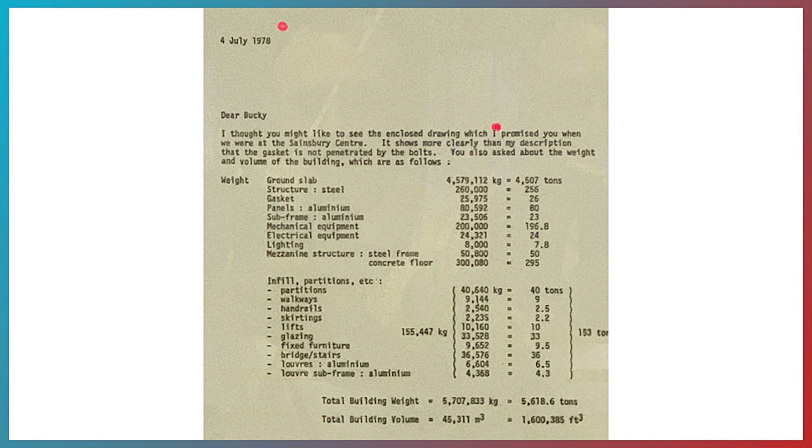Bucky asks, 'How much does your building weigh, Mr. Foster?' Two weeks later, Foster responds with a detailed letter writing, 'Dear Bucky, you asked me about the weight and volume of my building, which are as follows.' He continues to list out each category with its weight indicated beside it, including the mechanical, the structural, the interior systems and finishes, with a total building weight at the bottom stated at around 5.7 million kilograms.

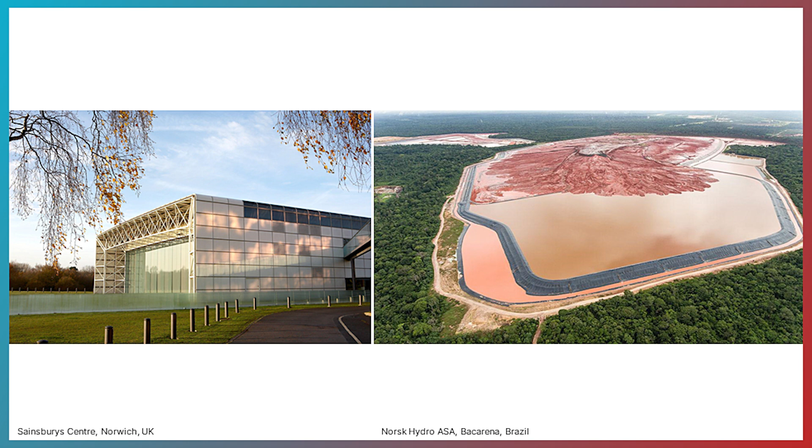However, that is not a true representation of all the weights generated by the building project. Mr. Foster's math is partially incomplete because for every ton of aluminum used in the custom panelized facade system shown on the left, 2 tons of red mud and mining byproducts are left in countries like Guinea, Australia, Brazil, and China, who export the world's aluminum. So you can't understand the Sainsbury Centre in Norwich without understanding the Norsk Hydro tailings ponds off the banks of the Amazon in Brazil. These are the same building, the same project.

So the same question should be asked of wood. What is the true mass of timber? I was fortunate that one of my first architectural jobs was a research position studying the Canadian timber industry, and I got to trace its lines across the landscape while zooming around Google Earth from the forest to the city, with a particular focus on the tools of harvest, methods, and machines.

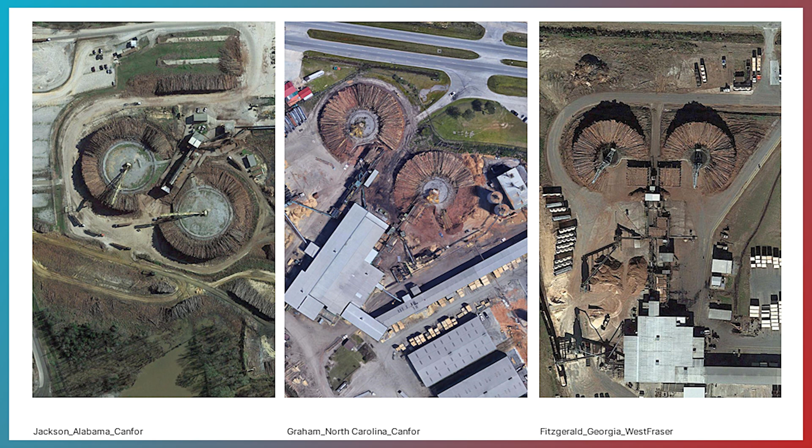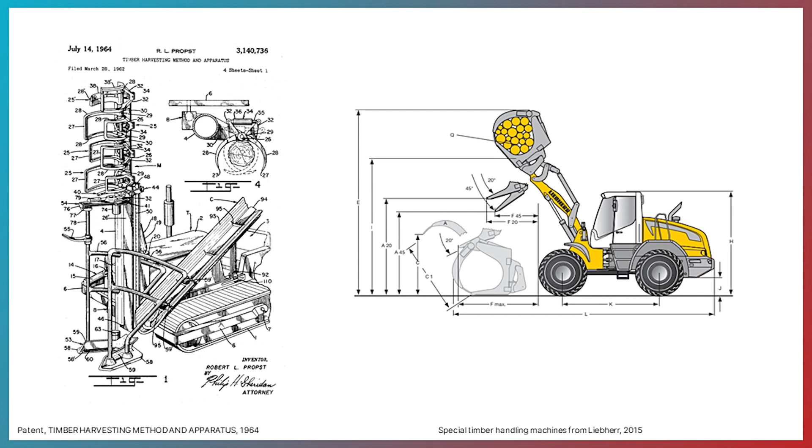As interesting to me as the statistics of roundwood sales or pulpwood exports, or even the literature on sustainable forestry management enforced across Canada, was the way the tools of harvest adapted to the land and to the true dimensions of the tree, like these remarkable geometries of play with the radial cranes, which are defined by the dimensions of the forest, the lengths and girths of the trees suitable for production. As a designer, I was especially interested in how the history of forestry shows that wood products have generally been shaped by the conditions of harvest rather than the conditions of construction or the inspiration of a draftsperson.

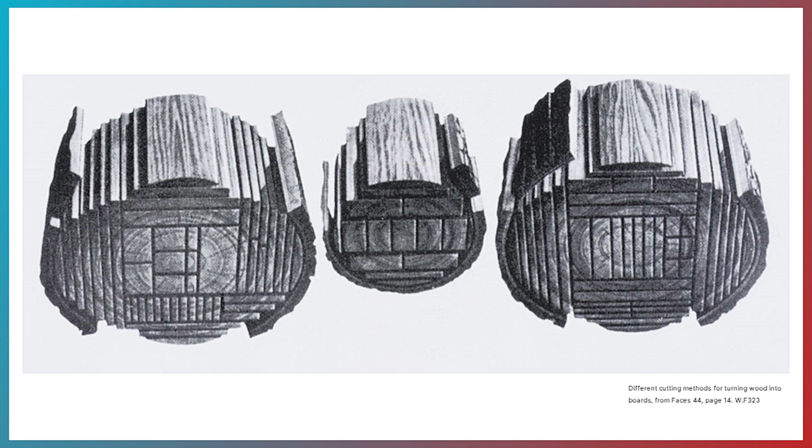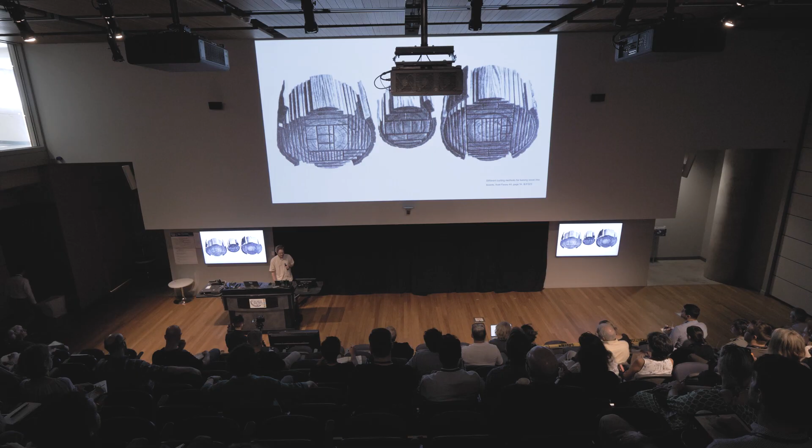I believe this can be a great advantage over other industries. Trees have a way of embodying their life cycles, presenting the externalities and history through its rings and textures. As experts in life cycle assessment, the tree is kind of doing our job for us—visualizing its own environmental impacts where it removed carbon from the atmosphere to hold in its woody tissue until it inevitably falls to make room for growth beneath.

I'm borrowing this fantastic illustration from Gray Organschi Architecture, a practice out of New Haven. This drawing illustrates how, unlike aluminum, wood has the opportunity to bring its full mass to our projects. Shown here is how each part of the tree can be used to meet the designs of our buildings.

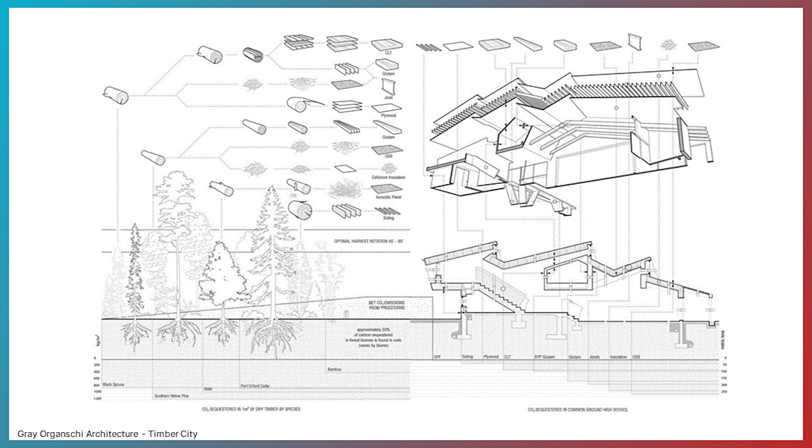At Half, we've come to understand mass differently, to include the externalities. One of my first experiences in understanding the true mass of a building was with this 7-unit townhouse development built in Toronto, just north of here, designed by Batay-Csorba Architects. We've had this saying around the office recently that we should just make it our motto to meet your heroes regularly, and this was definitely one of those situations where we got to have conversations with Andrew, the architect, which illuminated some of the project constraints and decisions informing some of these beautiful details and material choices.

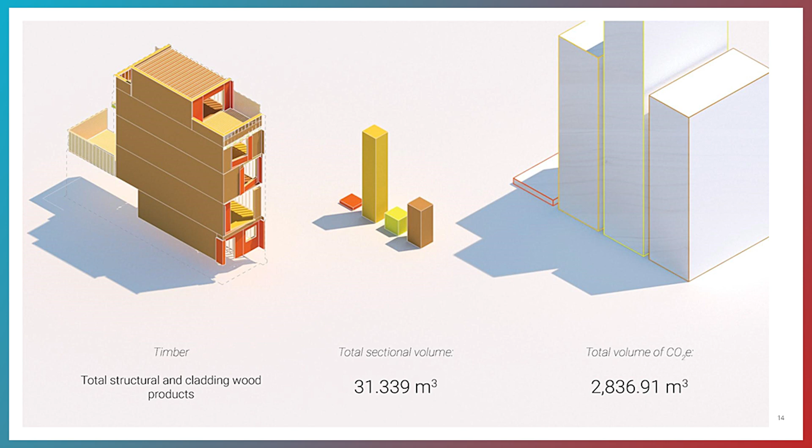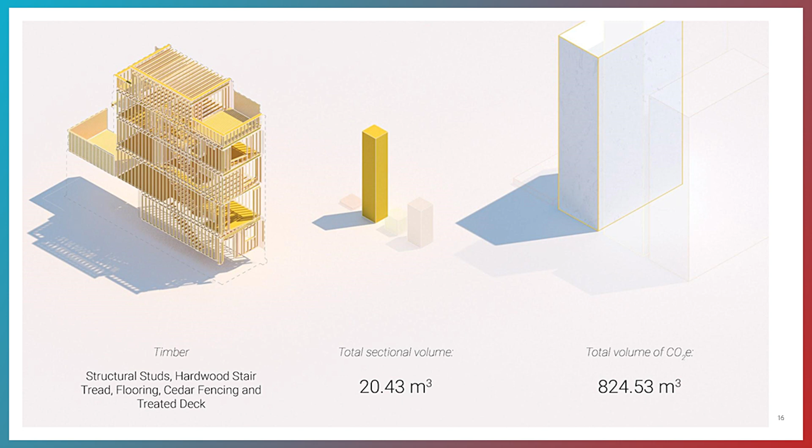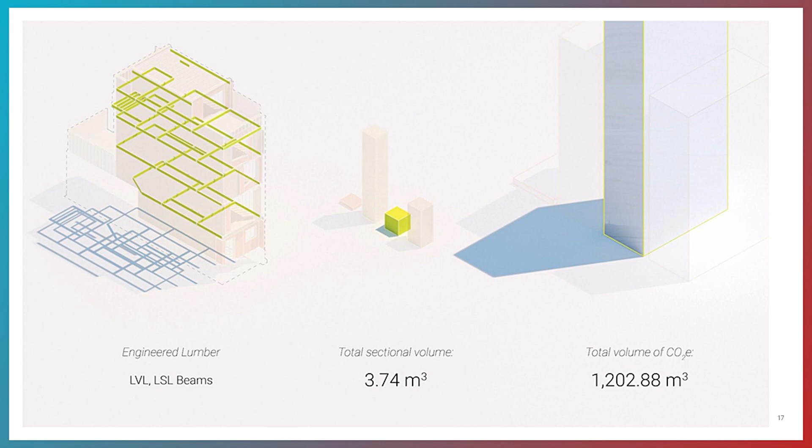The floor joist supported by LVL beams is the lowest mass category with the highest emissions in the wood category. And the OSB, the sheathing product, shows nearly twice the embodied carbon intensity of the lumber when compared kilogram per kilogram.

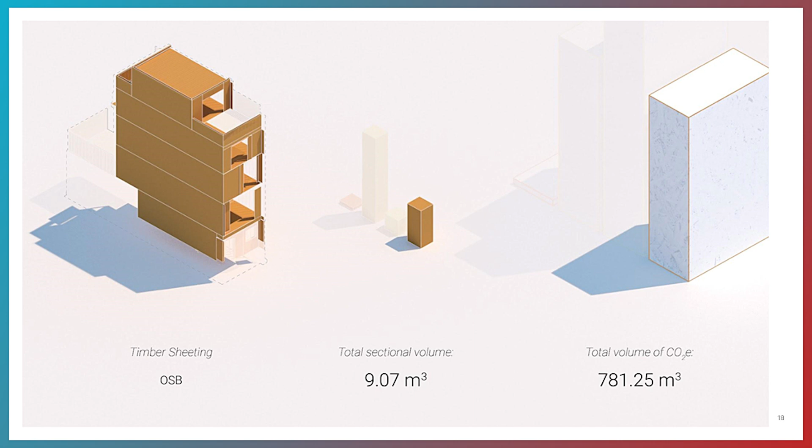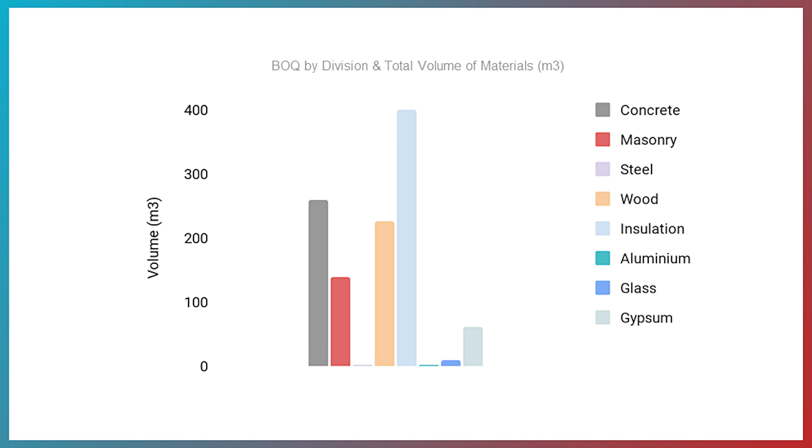But interestingly, when you compare the total material volumes of the entire project, it shows that what I thought was a wood building is in fact a concrete or foam building, where even this simple foundation, no basement, just a parking structure, an at-grade parking structure, accounts for a majority of the upfront emissions.

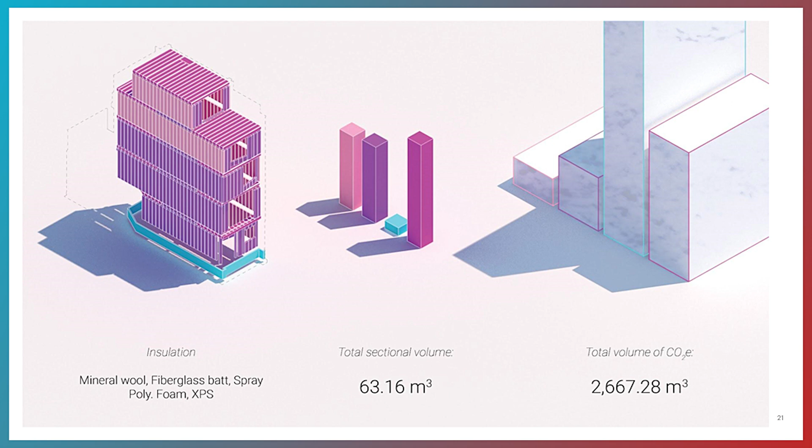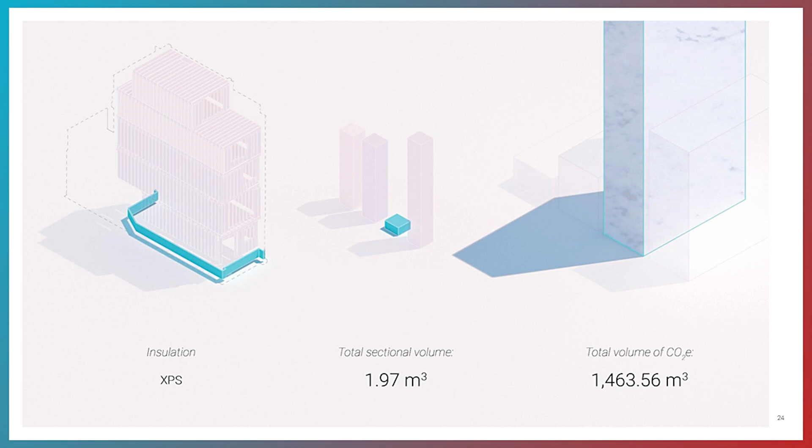And the same is true for the insulation. Different products like the mineral wool, low density mineral wool with minimal impacts, fiberglass batt, the same. The XPS insulation below grade, where 2 cubic meters of the material account for almost 1,500 cubic meters of atmospheric carbon.

And spray foam. During this project, I was shocked to see not just the quantity of foams and plastics and other oil-based products like asphalt roofing, but when you look at the environmental data, the significant impact of these products.

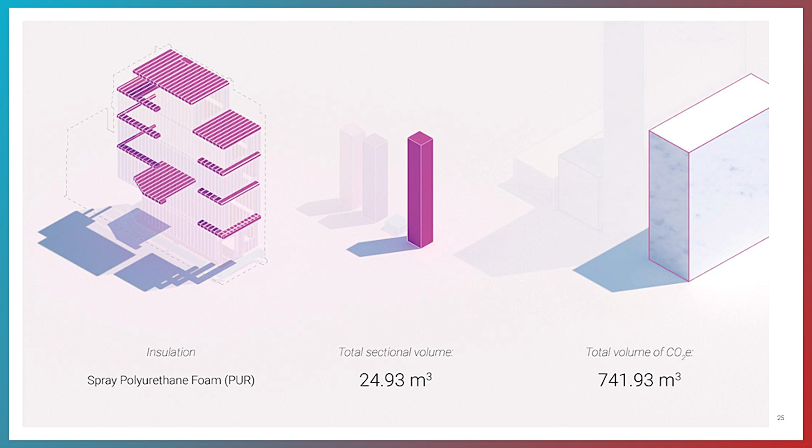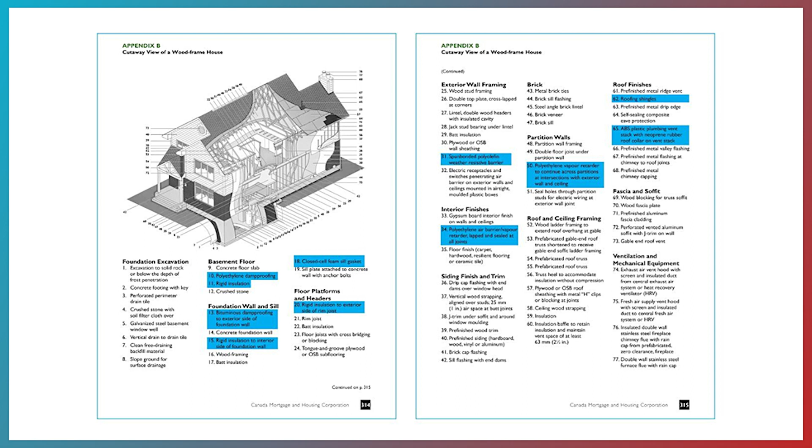And so why is that? Why are we doing this? Because documents like this, the Canadian Wood Frame House Construction Guide, tell us to do so. If you look inside this guide, you see the list of things that make up a Canadian home, and 11 of them are made of oil. It's what we're being instructed to do as builders and designers.

This led me, as a part of some of my thesis work at the University of Toronto, to survey the history of insulation in Canada. And what you find when you look beyond the past 100 years is that insulation and airtightness in buildings had previously been accomplished through natural materials. And I'm convinced that the green buildings of the future look probably more like the ones of history than the ones we're building today, built with stone, earth, wood, and vegetable fibers.

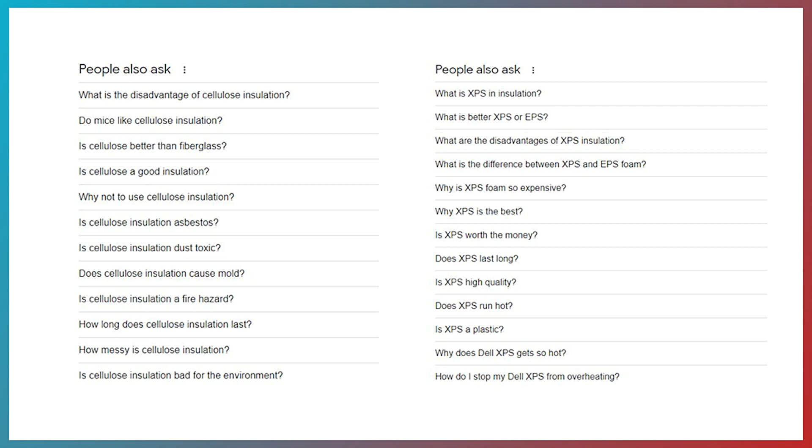And why is this? It's what we're being told. If you Google either cellulose insulation or XPS insulation, Google returns your query with diametric question prompts. On the left here, you see for cellulose, and on the right, you see for XPS, where for cellulose, it's generally negative connotations, and the right is positive. For example, is cellulose bad for the environment? Which is a bit of an absurd question. And on the right, why XPS is the best? An equally absurd question.

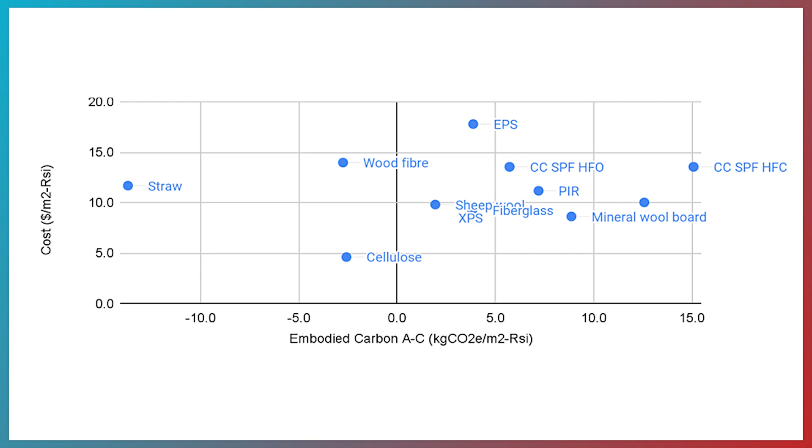HAF recently looked at available insulation products, plotted them against embodied carbon along the x-axis and cost in dollars per meter squared RSI in the y. And while it's not always an easy specification substitution, we have become accustomed to using materials which are not the lowest embodied carbon options and which in some cases are not even the lowest cost options.

And I do a lot of long distance riding in this area. It's a part of the world I love very deeply. And it just makes me rethink how I can be a part of change to low carbon, locally sourced building materials from this area. And so this is why we founded HAF.

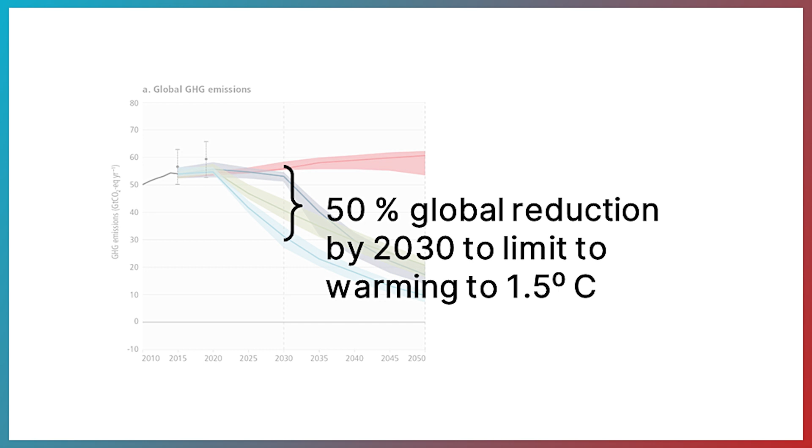As experts in life cycle assessment and the circular economy, we're aiming to halve the emissions of the built environment this decade by working with designers, builders, and policymakers. This instinct, of course, was motivated by early IPCC reports, which indicated that global greenhouse gas emissions needed to be reduced by 50% in order to limit warming to 1.5 degrees Celsius. 50% of what? For buildings, this includes the operational emissions and the embodied material emissions.

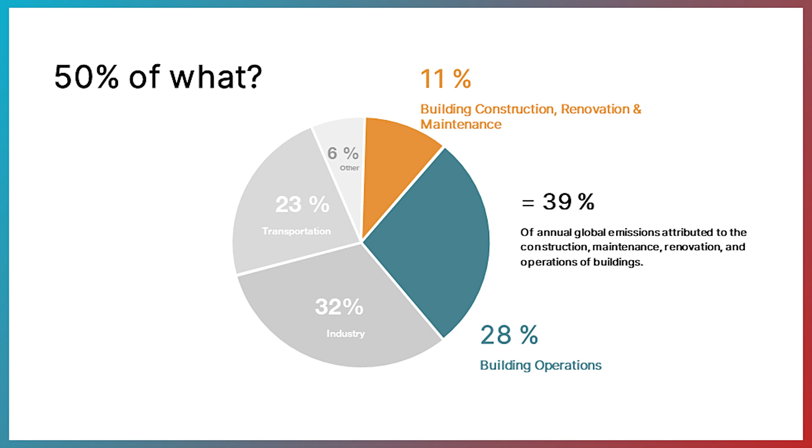This graph is a common one, which I would think you've seen.

So how do we do this here? Led by Kelly Doran, the Ha/f Research Studio began at the University of Toronto to ask this question: how do we halve the embodied carbon of all construction in Canada this decade?

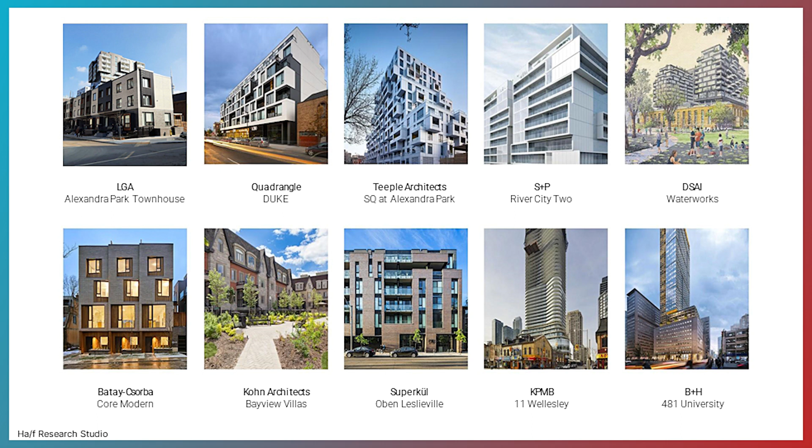To date, there have been 3 years of students trained in life cycle assessment to ask this question. We completed the first upfront embodied carbon benchmark of residential buildings in Toronto, taking this group of 10 projects, which range from low-rise, mid-rise to high-rise across Toronto.

Another year, we looked at the university campus, assessing some of the newer buildings constructed, and the goal was to assess not just the embodied carbon, but the operational carbon simultaneously using the operational data provided by the university.

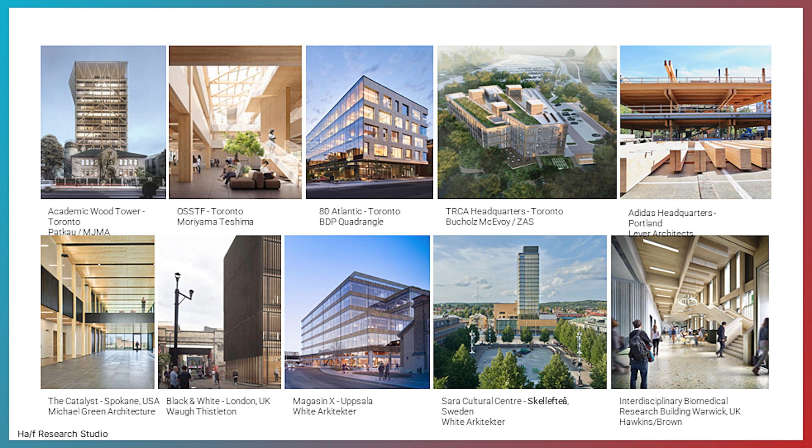We also looked in another year at mass timber buildings. Are they as low carbon as they claimed? Of the 10 projects here, 4 of them are in Toronto, 2 are on the West Coast, and 4 were European projects from the UK and Sweden.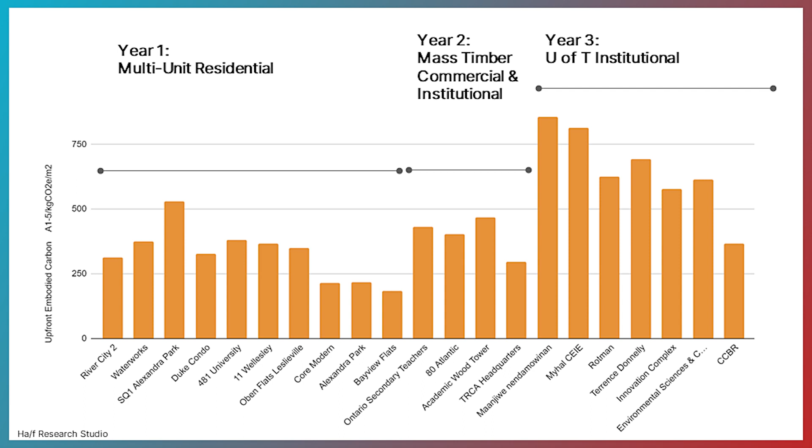So here's all those buildings across the 3 years of the Ha/f Research Studio. This is the upfront embodied carbon intensity. For the residential projects, the results were fairly linear from low to high rise. Commercial and institutional projects are programmatically more material intense, so there's just going to be an inherent higher carbon intensity for these projects. But what you see with the mass timber projects is that they are significantly lower than the U of T buildings.

Although the goal was to train students, it was also about reaching out to the industry, partnering with the designers that were in some cases working on these buildings actively to start conversations. Education is core to the work we do at HAF and continues to be. This year, we've led seminars and workshops about life cycle assessment training with both the Toronto Society of Architects and the Ontario Association of Architects.

So what's driving these emissions? Our buildings are icebergs. Foundations, basement parking structures, and below-grade floor area have disproportionate impacts on the project's embodied carbon.

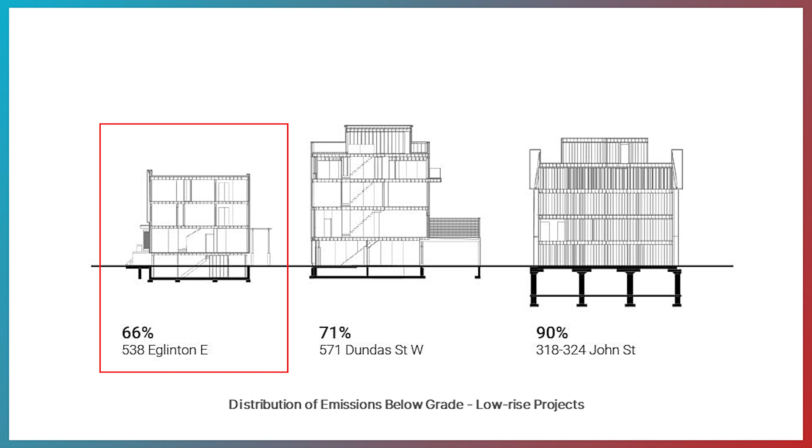So let's go back to our timber townhouse. 66% of the embodied carbon emissions in that townhouse were below grade, including the concrete, the membranes, insulation, and damp proofing. The same was true for the other low-rise projects—in one case, 90%, where there was a one-story below-grade parking area.

So for a project that I wanted to consider a timber project from an embodied carbon perspective, this is a basement with a stick frame, much like the majority of Canada's housing. Looking at the mid-rise and high-rise buildings, the results were the same, ranging between 20 to 45, 50% of the emissions of multi-unit residential buildings is underground.

The only exception here is 3 from the left, 22 Trolley Crescent, which because of soil contamination and groundwater restrictions, they weren't able to go below grade, which turned out to be a big benefit for them.

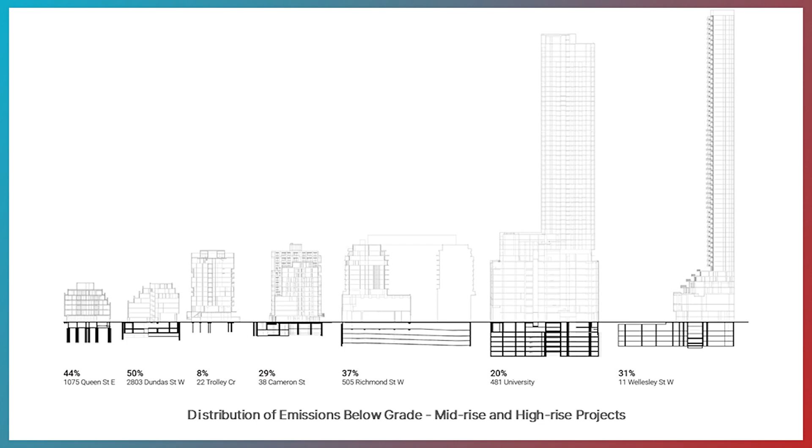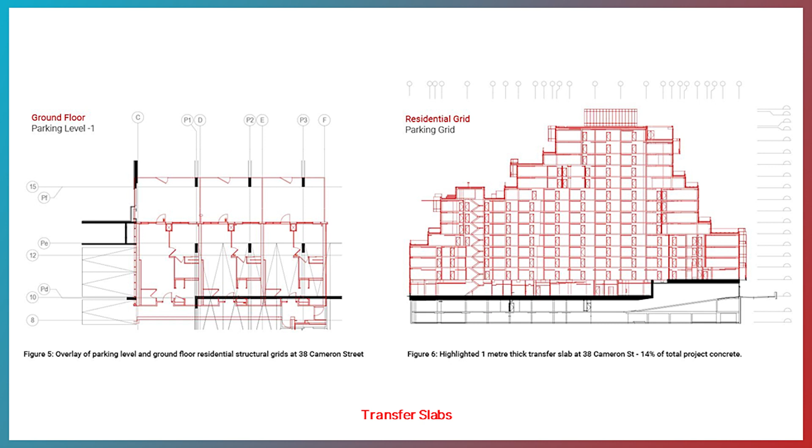The problem gets stacked with going below grade when you need to transfer the structural loads to accommodate different program. Parking and residential units is a classic problem in the city of Toronto, which has been primarily solved using transfer slabs and transfer beams. Uncommon in other parts of the area, this is a huge impact to the embodied carbon of our projects. And just because a building structure is mass timber doesn't necessarily mean it's low carbon.

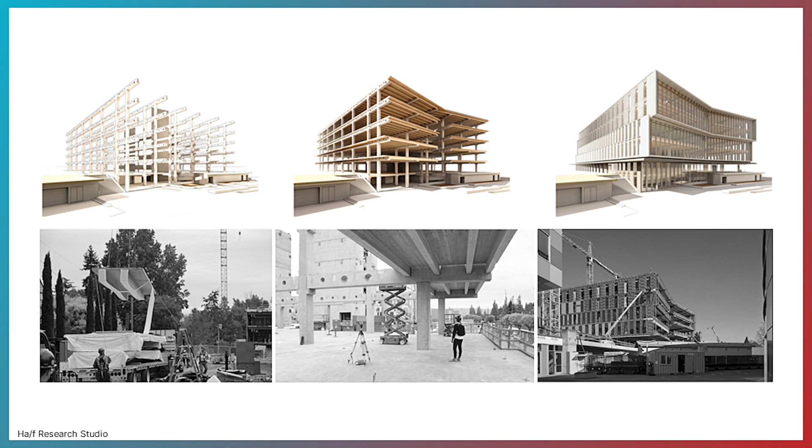The iceberg scenario can still apply. Like the Adidas headquarters project, this really sophisticated hybrid system of precast concrete and mass timber—the same scenario was happening with more than half the emissions found below ground. Kind of the dividing line there is above, and you can see a 5-story below grade parking.

Second, use less metal. Aluminum extrusion-based glazing and facade systems carry the highest embodied GWP by volume of all building materials.

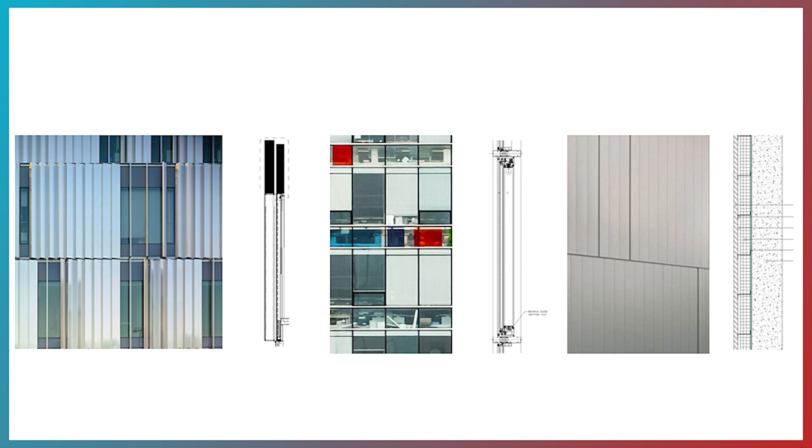Curtain wall systems, window wall systems, top hat, metal panel, aluminum panel, rain screen.

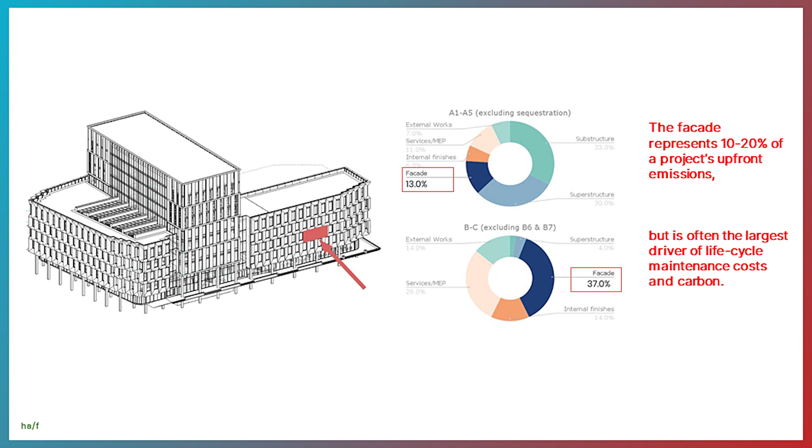When you look at just the upfront carbon, the facade only accounts for 10 to 20% of the project's emissions. Not too significant. But if you consider the whole life, the use phases like the B and C in life cycle assessment, the use phases and end of life phases, that impact increases to 37 or 40%.

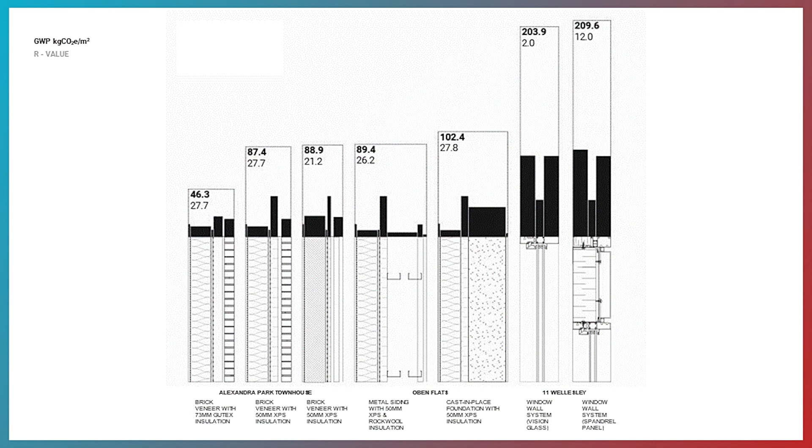So it's really important to consider the whole life of the building because of replacement and repair. We've also studied embodied carbon side by side with R value. What is the trade-off with those two performance criteria? Here's a quick snapshot of low-rise, mid, and multi-unit design, where the window wall systems are not only the highest emitting systems, but also the lowest thermally performing.

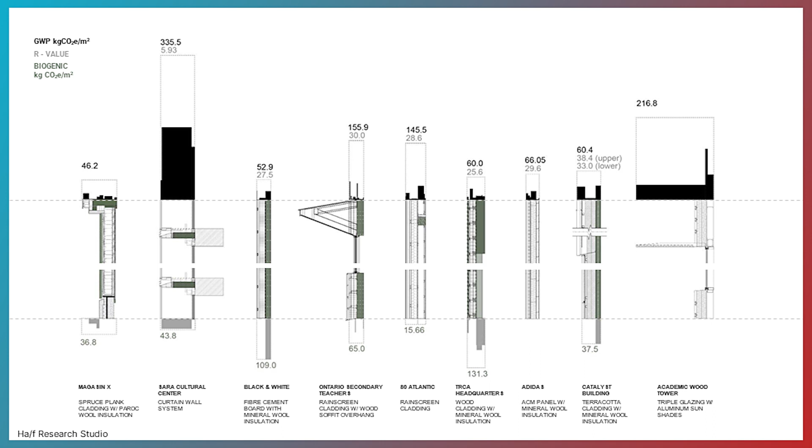In the mass timber study, we got to see some amazing envelope systems, which arguably were climate positive. A high amount of biogenic and bio-based materials like cedar cladding can perform the same way as other opaque systems, but not have the high embodied carbon. They can also look pretty good.

Geography really matters. The grids our material sourcing and fabrication sit upon drives upfront emissions, while the grids our buildings sit on drive operational emissions.

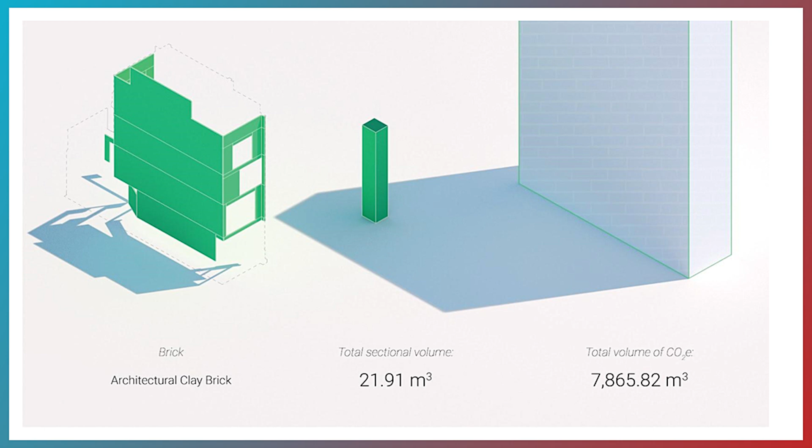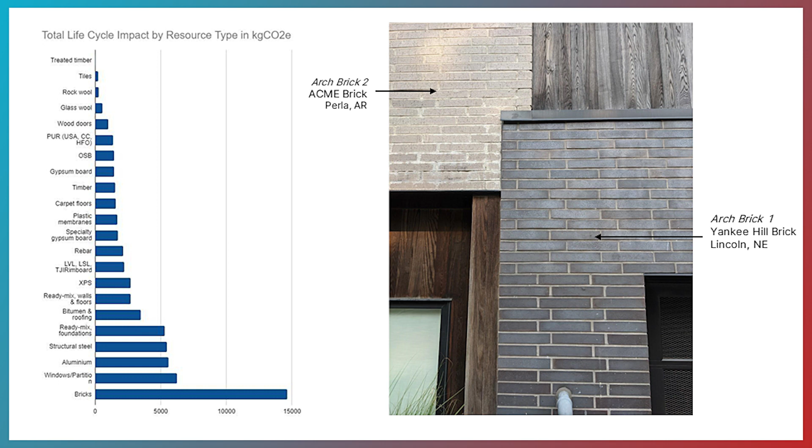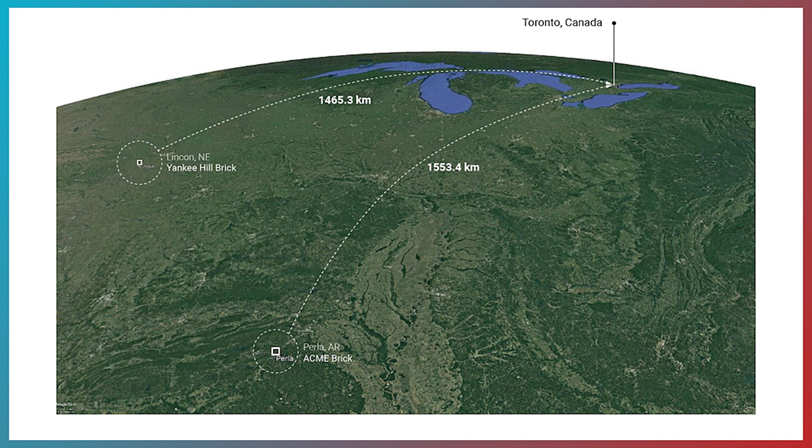Back to the townhouses, but looking instead at brick. The project had a fairly refined and rich design for the brick cladding. They couldn't find the right brick locally, so they had to search a little farther around North America. The two types of brick came from Nebraska and Arkansas. Pretty far distances. You might think, well, that's the emissions there, all the diesel to get it to site.

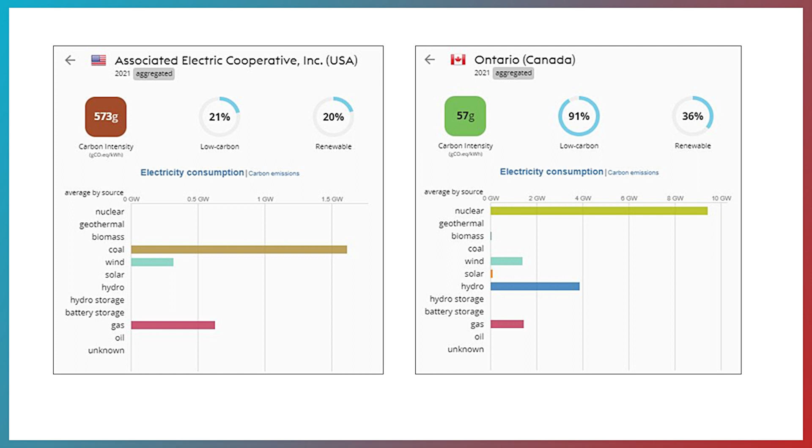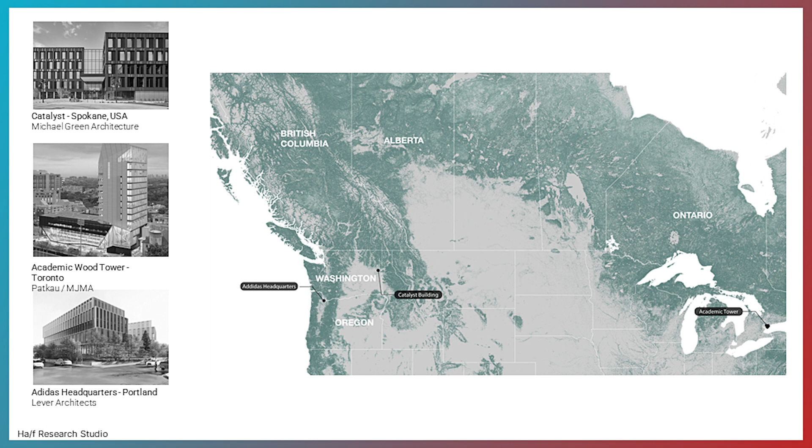Distance can have an impact though, and we saw that with these three mass timber projects. The first, the Catalyst building in Spokane, designed by Michael Green Architecture; U of T's very own academic wood tower, a collaboration between MJMA and Patkau Architects; and the Adidas headquarters in Portland by Lever Architecture, supplied by 4 suppliers of mass timber products, who were in turn supplied by 5 different lumber mills from Alberta, BC, Washington State, and Oregon.

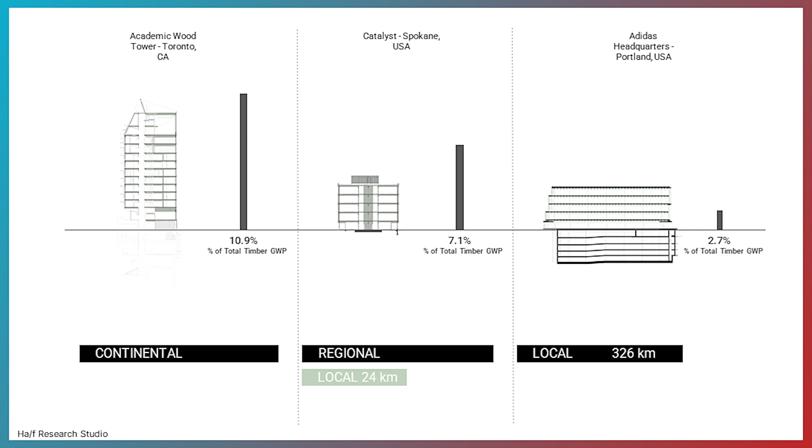What's being shown is the percentage of total timber GWP. So just looking at the timber product, what portion of that was attributed to transportation distance. For the wood tower, it was 10.9%; for the Catalyst building, 7.1%; and for the Adidas headquarters, which was able to source local timber, it was only 2.7%.

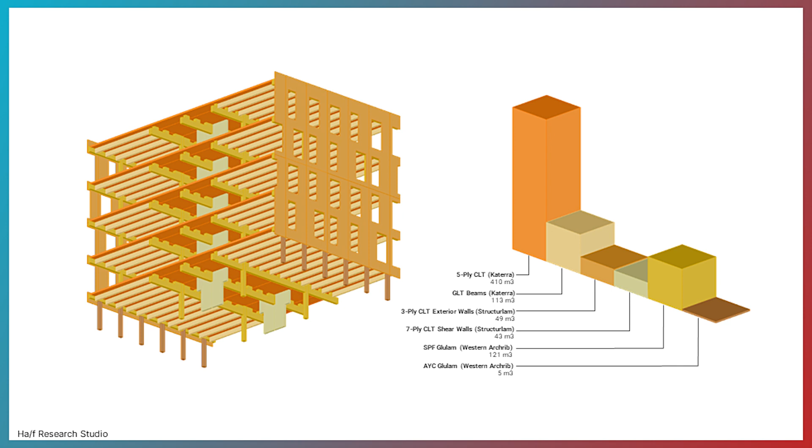A closer look at the life cycle assessment data of the Catalyst building again revealed why geography matters. The building used mass timber products from 3 suppliers, and the 5-ply CLT floor had the largest volume of those materials, which is to be expected. The results of the Ha/f LCA were 357 kilograms of CO2 equivalent per meter squared.

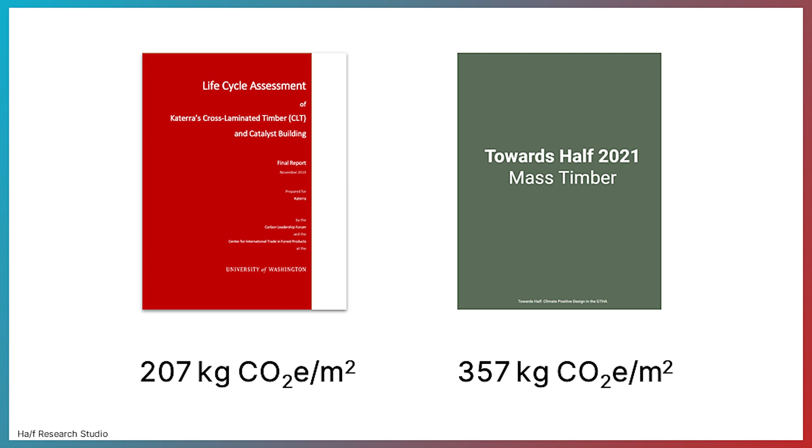However, the student was surprised to see that this result was actually significantly higher than an LCA completed on the same building by the University of Washington a couple years prior, which came out at 207. What could account for the discrepancy when looking at the same building?

A close reading of the environmental data used shows that the University of Washington LCA primarily used industry-wide or generic environmental data. That's data across a number of manufacturers or a larger region, whereas because the project had developed further, the Ha/f studio was able to use product-specific data. This uses an environmental product declaration from a specific manufacturer about specific products. It's a much more accurate representation.

So where wood comes from does matter. Does it travel a great distance to get to site? And what electricity was used to produce it?

Point 4, and this is the last one: take a whole life view of carbon. Only by looking at both the embodied and operational carbon over the life of a project can we begin to make holistic decisions about carbon reduction.

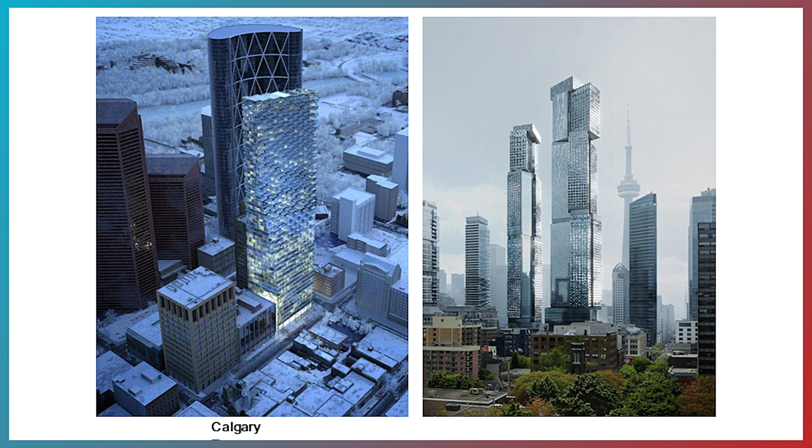So here are 2 very similar buildings. In a way, they're both designed by starchitects. They're concrete frame, clad in aluminum residential buildings. One is in Calgary on the left by Bjarke Ingels, and on the right, you have the Frank Gehry Towers in Toronto.

But when you consider the city they're in and the region they're in, they actually need to be designed quite differently. For Calgary, because the operational emissions will be so significant, powered by the burning of fossil fuels, over time the emissions of the operations of a building will eclipse the embodied carbon emissions of a building.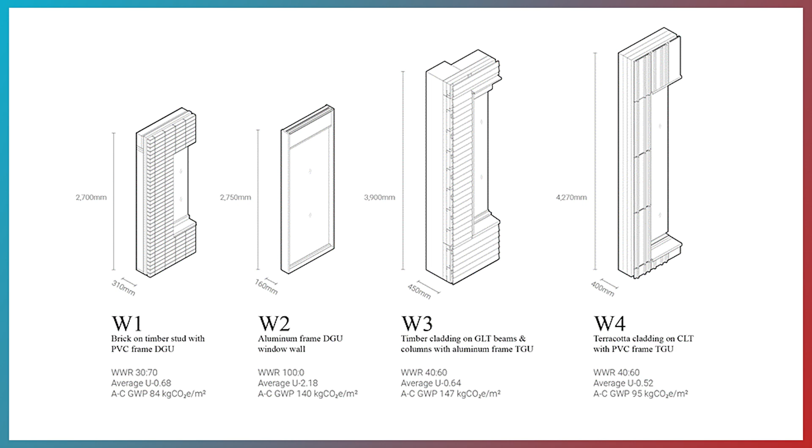We took a look at this more closely, looking at the envelope. With Ted Kesik at the University of Toronto, we took 4 wall assemblies, 2 on the left residential and 2 on the right mass timber. We broke out the different material quantities within the assemblies and got results for their environmental impacts. You see aluminum, PVC, glass are the kind of big offenders, where in some cases the timber products are small slivers in the stack.

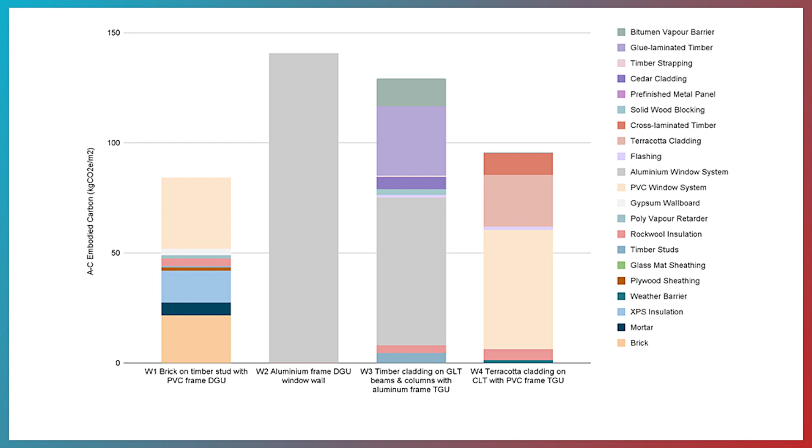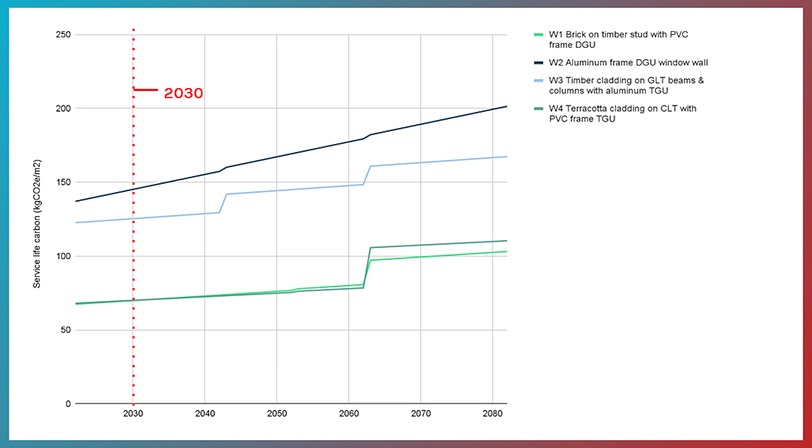We then added the operational carbon to that embodied carbon to get a graph like this, where over time what you see is the slow increase of emissions from the operational use of the building, marked intermittently by jogs of repair and replacement.

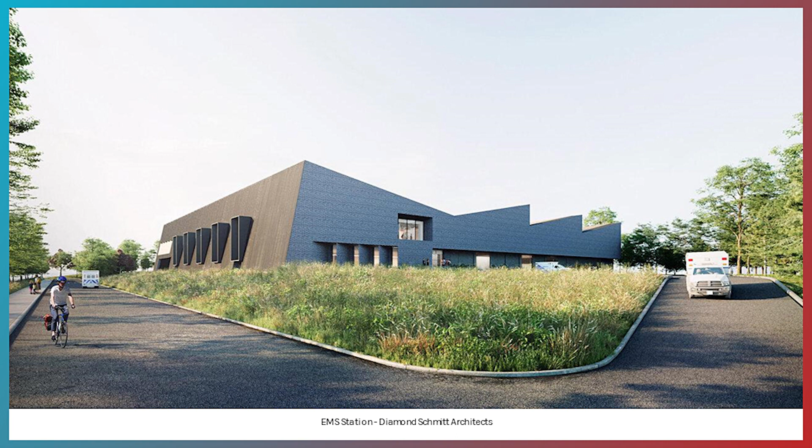So we can do this here. At HAF, we took the research from the HAF Research Studio and approached the city. We got funding to do a policy primer to inform policy that would regulate the embodied emissions of buildings. We took a case study with them, an EMS station being designed by Diamond Schmitt Architects, a CLT structure system, and we did a life cycle assessment.

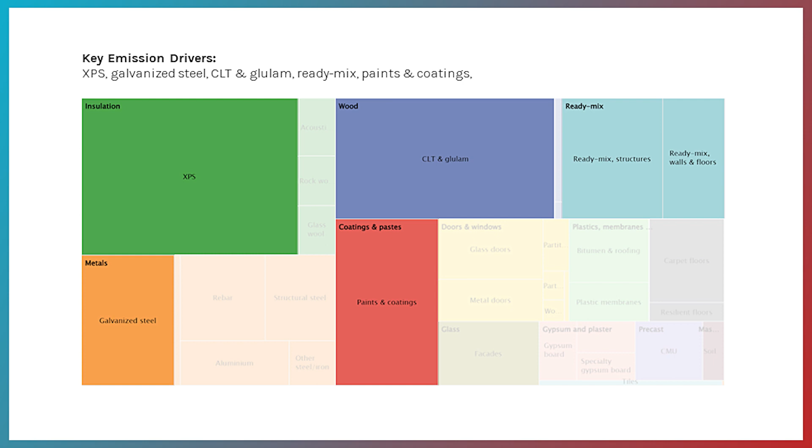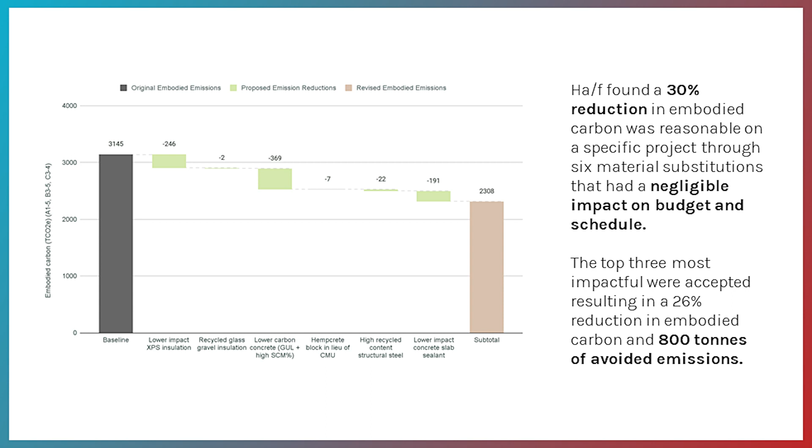It was in a late stage of design, and the opportunity was to make some specification changes that would reduce the overall embodied carbon intensity. So we identified some of the key material categories and proposed alternatives that would reduce the overall emissions. In this case, the top 3 recommendations we made were accepted and have been implemented in the building, resulting in a reduction of 800 tons of avoided emissions.

I'm excited to say that as of a couple months ago, revisions to the Toronto Green Standard have been adopted that include, for the first time for a city in North America, absolute embodied carbon targets for city-owned buildings and for Tier 2 buildings. We're continuing our work with the city, now looking at the urban design guidelines, asking the question: are there unintended consequences to these guidelines on the embodied carbon of structures and buildings?

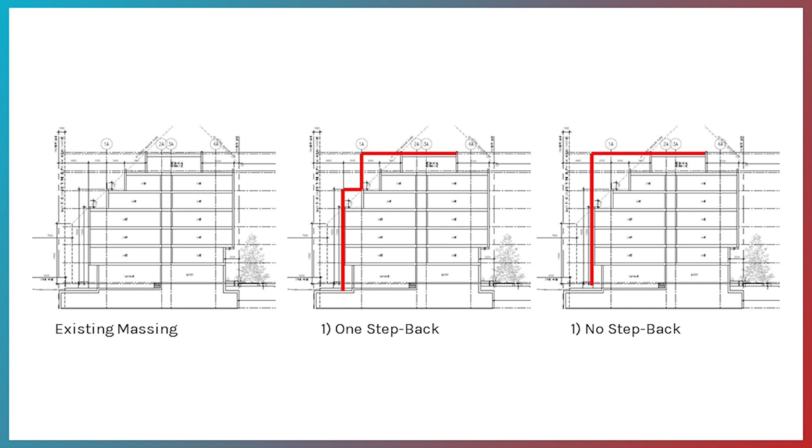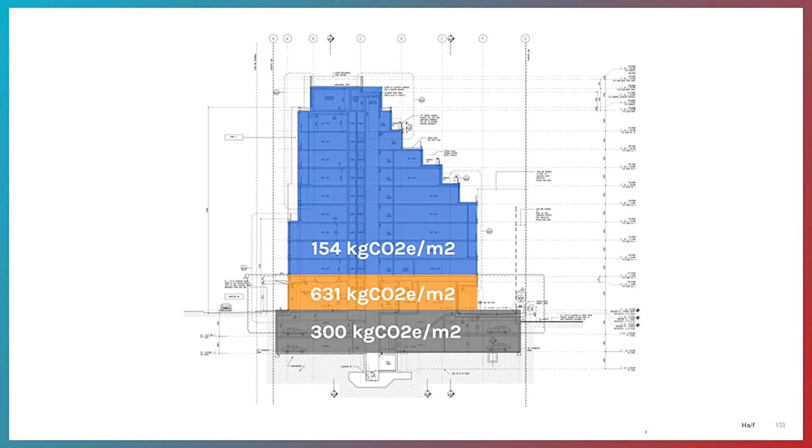Looking first—our intro to that was looking at the step backs, understanding the different zones of a typical mid-rise construction that is, one would say, at the mercy of the angular plane—and proposing that a move to simplicity could reduce the embodied carbon of these structures.

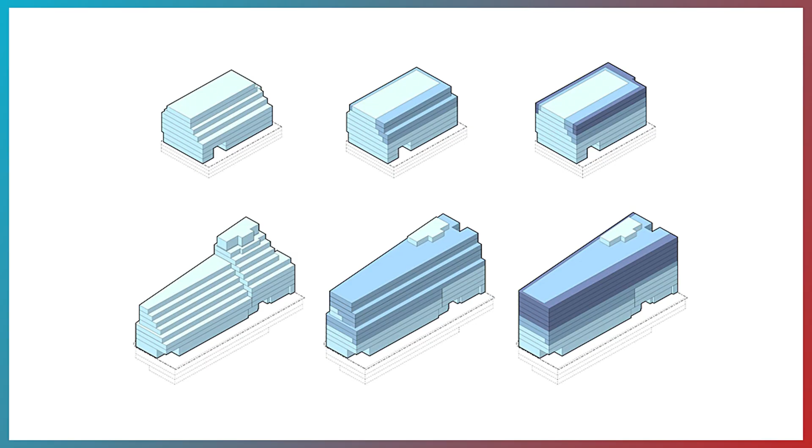It would also move to a wider range of structural systems, and I think the encapsulated 12-story mass timber was definitely on the front of our minds, considering how urban design guidelines could make way for more of that construction in Toronto. And finally, this is something we're exploring with the Mass Timber Institute out of the University of Toronto, Entuitive, and Bird.

Unfortunately, the report is not complete yet, but definitely keep an eye out, because we will be releasing a study which is going to be an embodied carbon and costing study for an archetypal office building, a 12-story office building, where Entuitive has designed 4 versions, 4 structural systems: concrete, steel, mass timber braced with no structural concrete core, and then a hybrid that has a structural core with some steel members also.

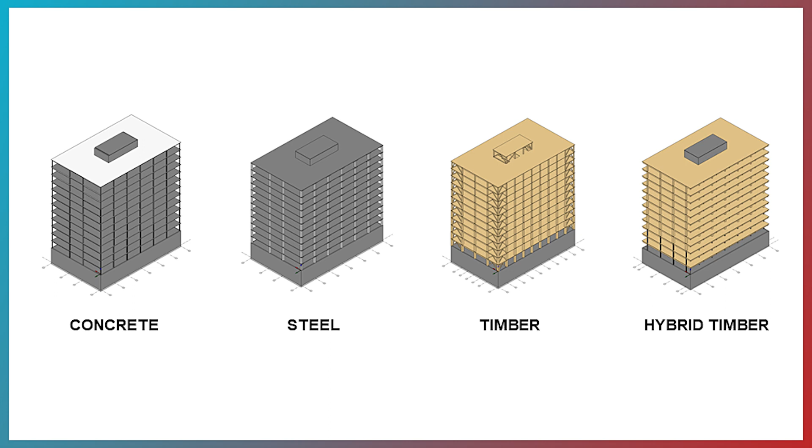And we're going to have each of those 4 designs in 3 cities across Canada—Toronto, Calgary, and Vancouver—to get cost and carbon data from the 4 systems. As a bit of a sneak peek, this is showing the embodied carbon intensity of just the structure only for this building in the city of Toronto, and the results are pretty telling; I think it's clear which kind of structural systems we need to be prioritizing.

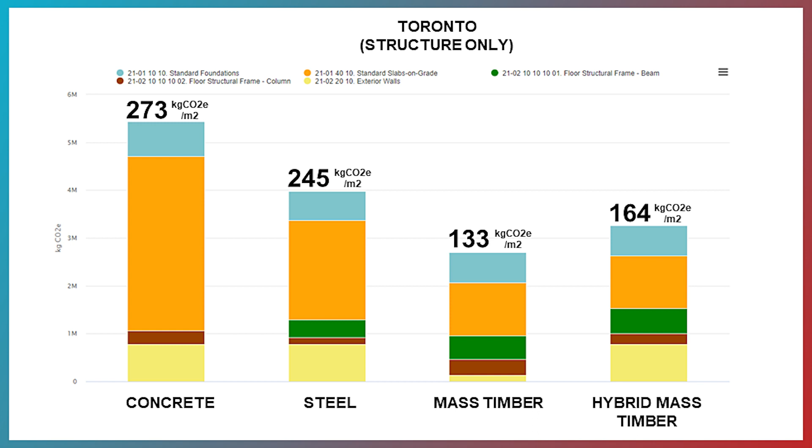Finally, a thought on the term mass timber, and then a question—that's the last thing. Terms are powerful. They can generate fields of exploration, but they can also limit scope. So my question is, can our understanding of mass timber expand to ensure diverse and sustainable forests accelerate all bio-based materials and generate the exploration of lower carbon emissions for all building materials? Thank you very much.